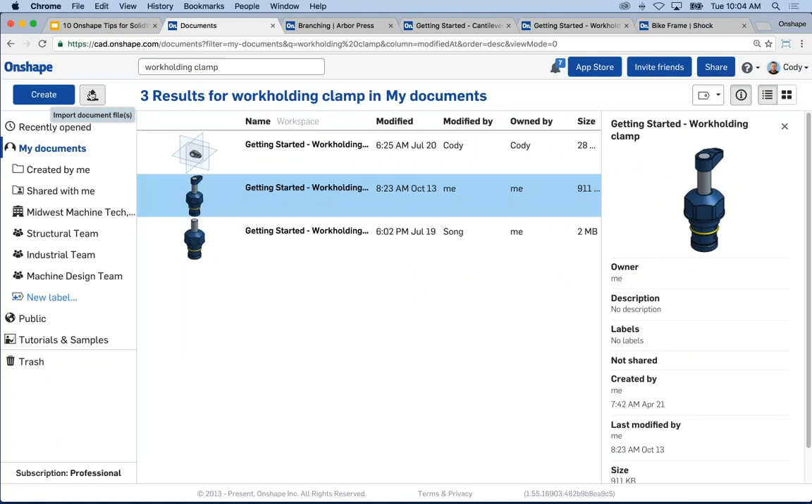You click import on the documents page, and you browse to the file, the zip file from SolidWorks. So here's a Come Along.zip that I've brought in from SolidWorks, and I'm importing it into Onshape. Now, one important thing that I want to mention is make sure that the zip file name matches the top level assembly name in SolidWorks.

And that's a default setting, so if you don't change the file's name, you should be fine. But just keep in mind, don't change the zip file's name before you import it. It must match the top level assembly in SolidWorks. So from there, I just choose open. I get my import options, just as if I were importing any other file. I hit OK, and it imports.

So that's really all there is to importing a SolidWorks assembly. The key thing is making sure that you have that zip file that you can then import. Once you import the zip file, it will of course upload and then translate so that you can actually view the SOLIDWORKS data inside of Onshape.

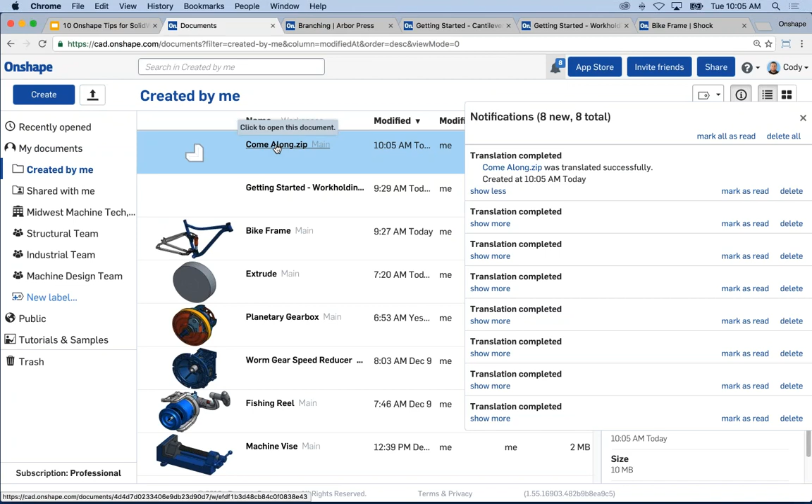So if we left click the come along here, it will take a moment to translate it, but what you'll get is all the tabs for subassemblies. You'll get a tab, of course, for your top level assembly. So here's my SOLIDWORKS designed come along imported into Onshape. So again, you get tabs for top level assembly, you get tabs for subassemblies. The parts will come in all together in a single tab, and they will come in the orientation they were modeled. So that's one important caveat that I want to point out.

And then also another question that gets often asked is, do the sketches or the features carry over? If I create a sketch in SOLIDWORKS, create a part, and then I import that into Onshape, do I see the sketch in the feature list? And the answer is no. It does not translate feature for feature.

So you do get all the parts, you get the subassembly architecture, the hierarchy that you're used to, but you don't see the individual features and mates that make up that assembly. And the key reason there is there's just a lot of differences between CAD applications that make that really not practical. So that's one of the first things that I wanted to mention.

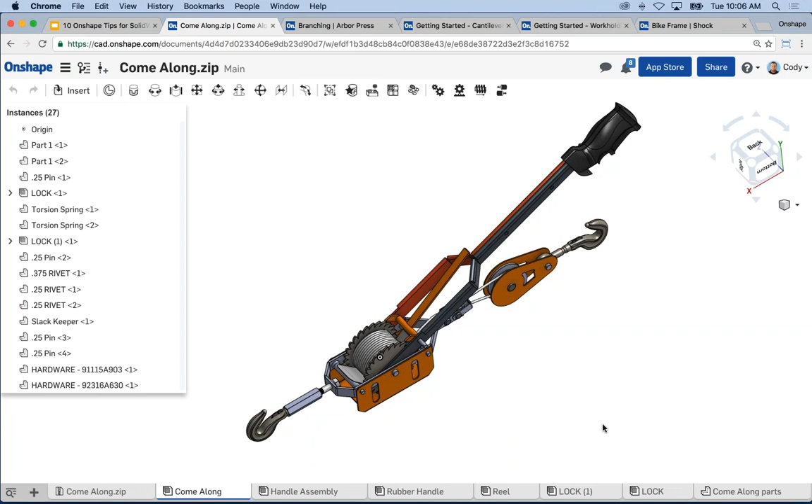Pack and go importing a zip file. You can bring in potentially hundreds of thousands of parts at once by using a single pack and go zip file. It's one of the easiest ways to bring over an entire project from SOLIDWORKS. So that is tip number 10.

Moving on, tip number 9 in my list is configurations. And it's one of the more common questions that we get from SOLIDWORKS users. I use a lot of configurations. What would I do in Onshape? In Onshape, we have the concept of what we call branches, and branches allow you to explore design variations. And it's probably the best tip that I would give if you're trying to create a lot of design variations in Onshape is create branches.

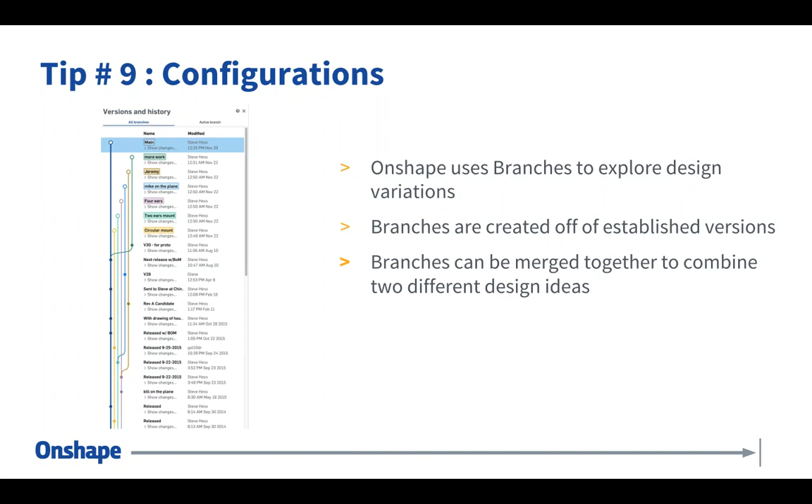Branches are created off an established version, and you can create as many branches as you'd like. And you can even take two branches and merge them together at some point in the future. So if you decide that you like the ideas of two different configurations or branches, you can take them and merge them together. Now I have a short demo of this, so I'm going to show you just creating a branch and then going through that process.

So here's a simple arbor press that I've designed. And let's say that I want to explore a version with a different base, or I want to build a configuration, quote unquote, of this arbor press that's different. And I don't want to impact this original design. The first step, and very important, is creating a version. So you'll see the button here, create version.

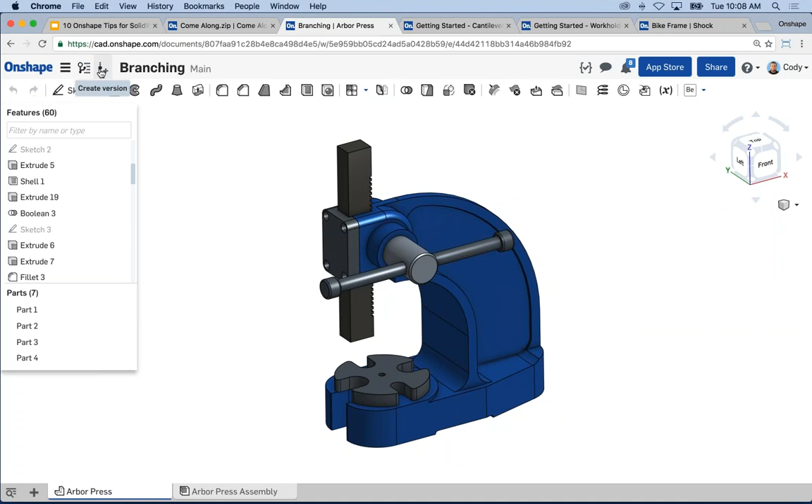Once you have an established version, here you'll see initial version, I can select the gear and say branch to create a workspace. And this is going to create a separate branch. Let's call this the square base. Click create. Now anything I do in this branch does not impact main, which is where I was at just a moment ago. And as I mentioned, you can do all the design changes that you want here. And again, it does not change anything downstream.

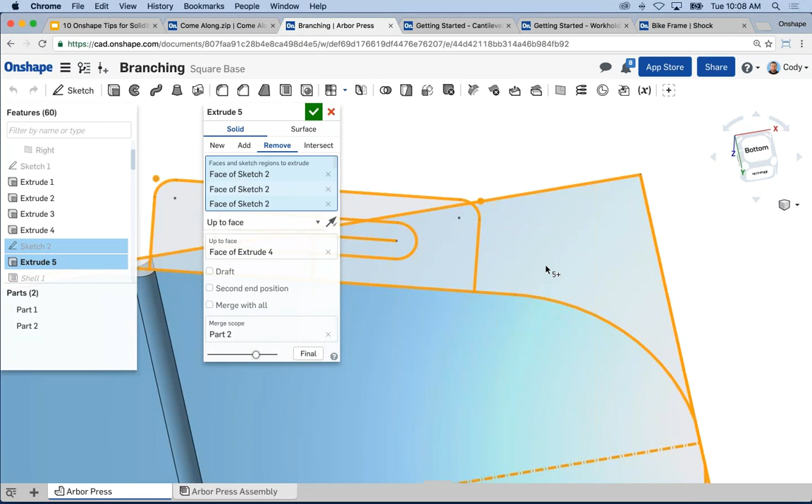So if I decide to edit this and start adding some faces, for instance, editing features only applies to the branch that you're in. Okay?

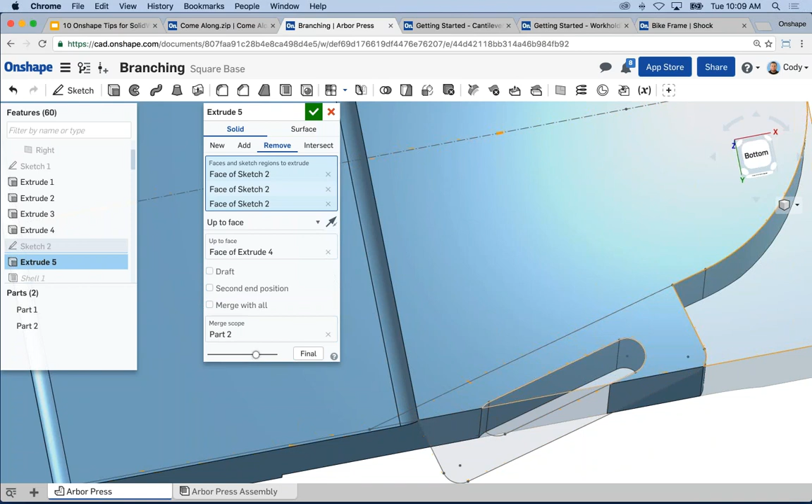So an important thing to point out, just make sure any design changes that you want happen in the right branch. Right? So now I can go through, select these individual contours, add to this feature, and create a square base version. Right? So we're editing this extrude, got all of our profiles. I'll hit the green check. That will then go through and rebuild and build a square-based variation of my arbor press.

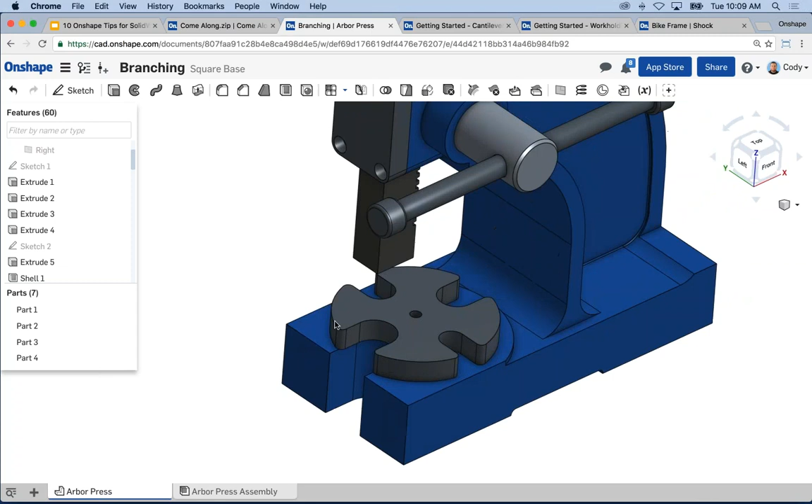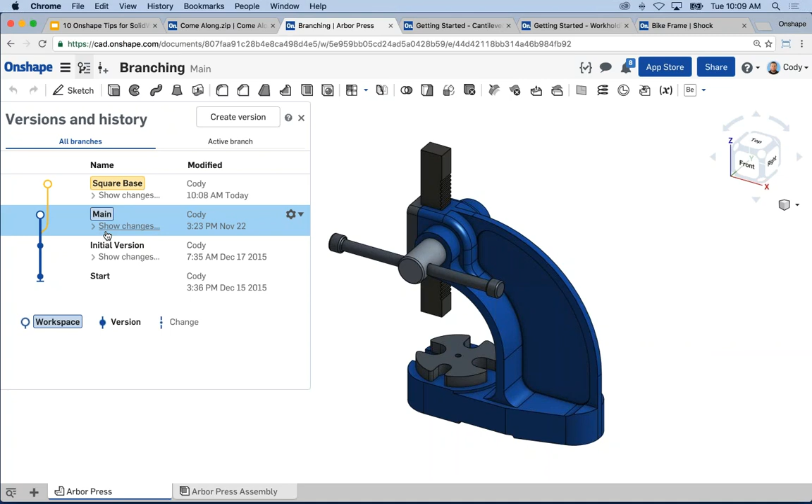The key thing here is, of course, anything that I'm doing only applies to square base. If I go back to main, you can see the design is the original, right? It's not impacting that. So you have these independent spaces to work, so to speak. So think of branching as your equivalent to configurations. It gives you that ability to explore different design variations.

All right, so moving on, the next tip that I have, tip number 8, the cut is not a separate button in the interface. And that's one important thing that I think a lot of SOLIDWORKS users miss on first glance is, I don't see an option to cut. Where's the cut button? And it's important to keep in mind, extrude, revolve, sweep, and loft all have an option within them to remove, and that's your cut.

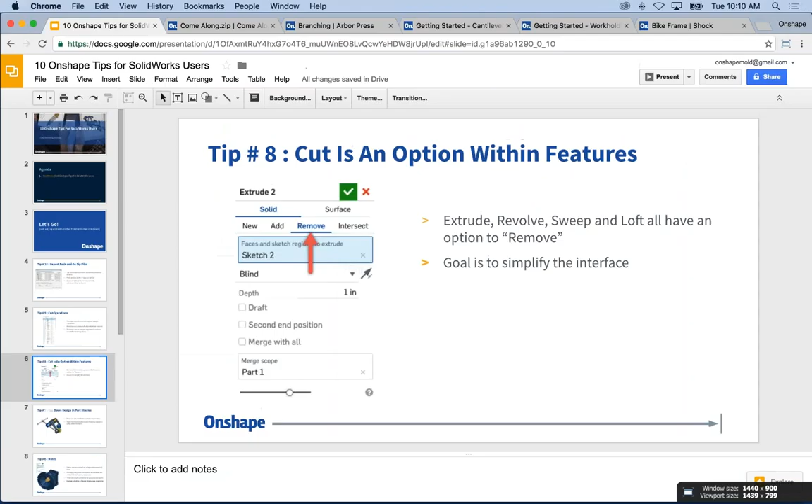And the idea is really trying to simplify the interface. So you go to the same button, whether you're creating a new feature and adding geometry, whether you're creating a cut, whether you're creating a whole separate part, it's all the same command. So let me show you a quick example of this, not terribly complicated, but I do want to point it out. When you're working in really any part studio, trying to create any feature, let's say that I'm designing this shock and I want to cut a hole in the bottom of the shock.

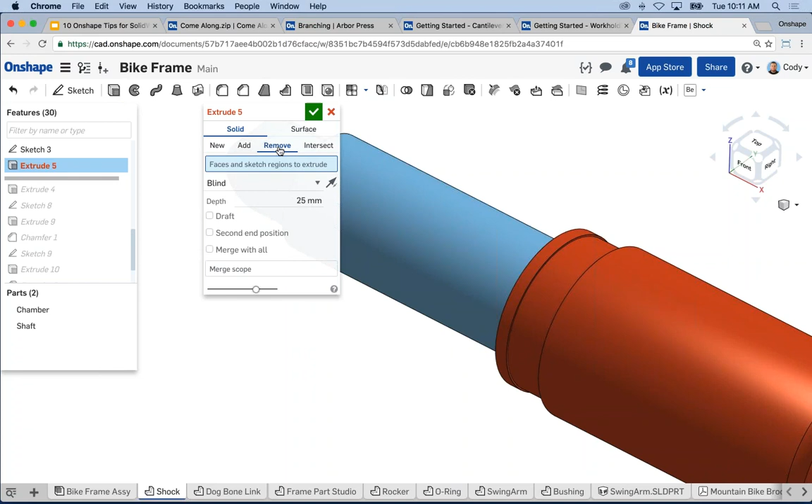And I've created my sketch 3 here. Notice again, no separate button for cut. I click extrude, then choose remove. That's the key. And then select the sketch that I want to remove. Now, in my case, I actually have several different parts. So I'm going to say I want to merge this cut with the shaft here, and I want a symmetric cut. And that's another small tip that I have for the SOLIDWORKS user.

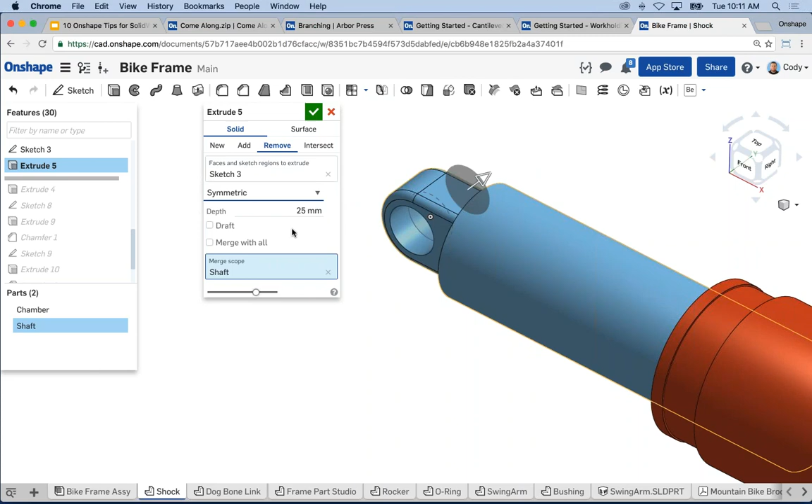If you're familiar with the option of mid-plane in SOLIDWORKS, we have what we refer to as symmetric, which gives you very similar behavior. Okay? So symmetric, I can hit the green check, and now I've created a cut in the end of this shock. And again, the key is whether it's extrude, revolve, sweep, loft, they all have that option for remove, and that will create your cut. So that's a big tip.

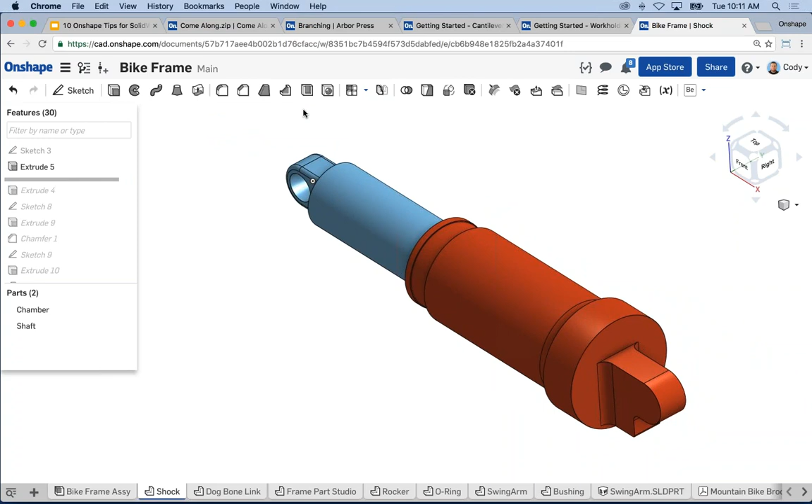It's one that can trip a lot of new SOLIDWORKS users up. Just keep in mind we don't have a separate button for cut. It's built into extrude, revolve, sweep, and loft. Now, let's move on to the next tip, and that is top-down design. And this is something that we get asked quite often. How do I build parts in context at the assembly level? And it's just because that's a common practice in SOLIDWORKS. I insert parts and I build parts with contextual relationships at the assembly level.

In Onshape, we've taken a different approach to this. You do not create new parts or modify existing parts in the assembly. You won't see those features listed in the assembly. They're only done at the Part Studio level. Now, what's different is in Onshape, you can have multiple parts in a single Part Studio, and it's actually a far faster way to do top-down design than building with the assembly context and having motion and all those things to worry about. So just keep in mind, if you're trying to build top-down, if you're familiar with the concept, top-down just means building multiple parts together with relationships to each other. We do that in Onshape in the Part Studio, not in the assembly.

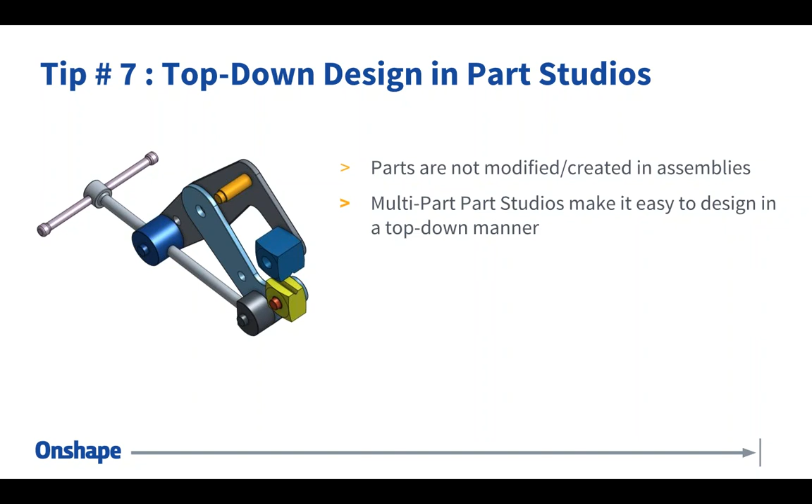Okay? So a short demonstration of this, I wanted to point out real quickly here, the cantilever clamp. So this is a single Part Studio in Onshape. And in Onshape, one Part Studio can have a single part. I can have any one of these parts by themselves, or you can model multiple parts together. And you can see in this Part Studio, I actually have 10 different parts. Large arm, short arm, threaded hinge, all these parts listed here. So this is a multi-part Part Studio, and the reason to do this is the same reason to do anything in a top-down manner. It just allows me a single place to change the design and have it impact many different pieces.

I'm not taking a lot of measurements between parts. I can drive everything off of previous geometry. Now, as I mentioned, this is a multi-part Part Studio, so you can build all the parts together in a single place. But you'll notice that I didn't model anything that wasn't unique.

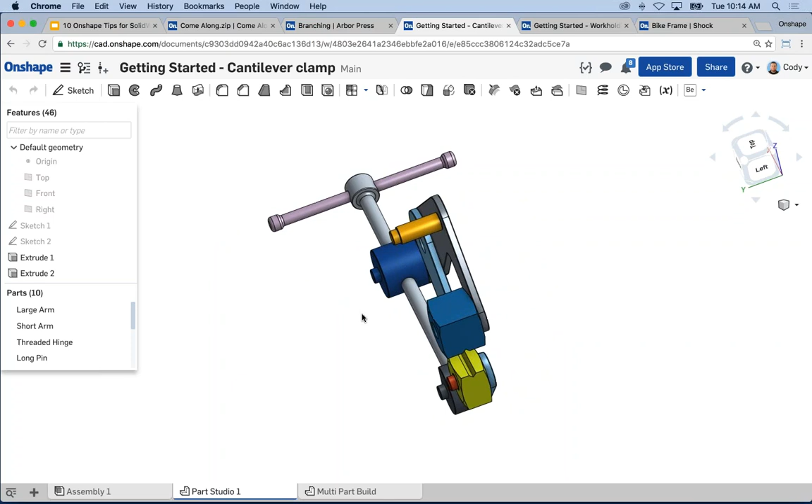In other words, this is a clamp arm that has 2 sets of arms. There's going to be another set on this side. And I could easily mirror them, but essentially this is the same part. So when we talk about assemblies, assembling all the instances, testing out the motion, that's when we get into assemblies. And that's really what assemblies are for.

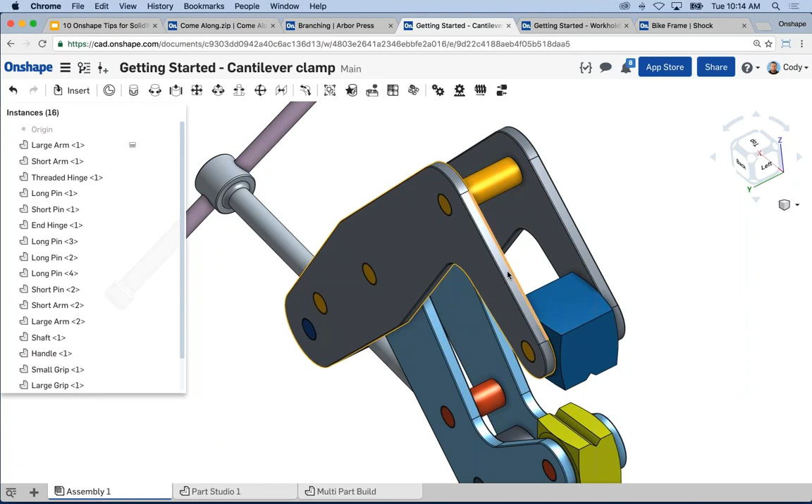So in Onshape, you create an assembly so that I can test dynamically the motion of my assembly. And I can also insert all the various instances of my parts, my nuts and bolts, and all the multiples of parts, put them all together and get an accurate bill of materials and so on.

Okay. So again, driving back to the top-down design concept, you can model multiple parts together in the same Part Studio. And this is the equivalent of building in context in the assembly in SOLIDWORKS. Real quick question. All parts in a Part Studio make a long feature list when a part becomes a little more complex, how to work around it?

Keep in mind, one of the biggest tips that I have for users with long feature lists is doing filters and searches. So if you go through and name your features, you can create filters and searches to kind of organize and easily find pieces within your feature list. And you could query by things like name. You can see a little tooltip there, type, part, and so on.

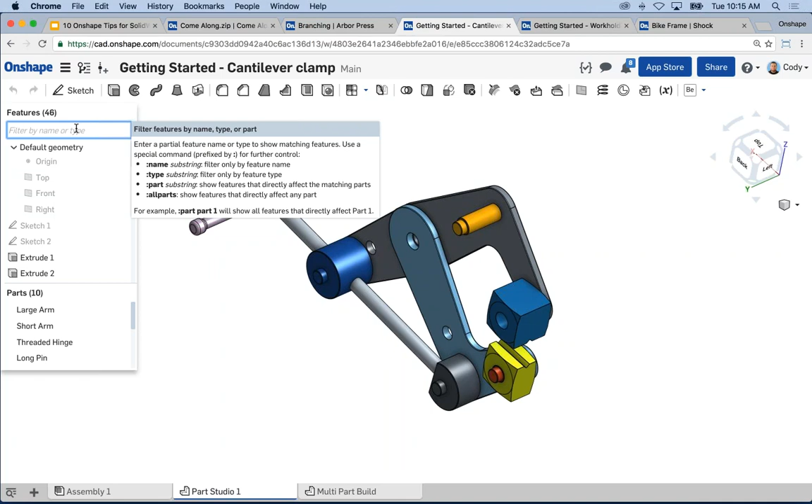So you have parts. I can say, show me all parts with this name, or this in the name. So anyway, the feature list filter, I should say, is an easy way to break down the feature list when you start to have lots and lots of features.

All right, so moving on, as I mentioned before, this is a single Part Studio with multiple parts modeled in this single space. How would you go about doing that? And what I'd like to do is give you a simple example. So let's break it down a little bit here. In fact, let's start from scratch. Let's delete everything but the sketch that drives it.

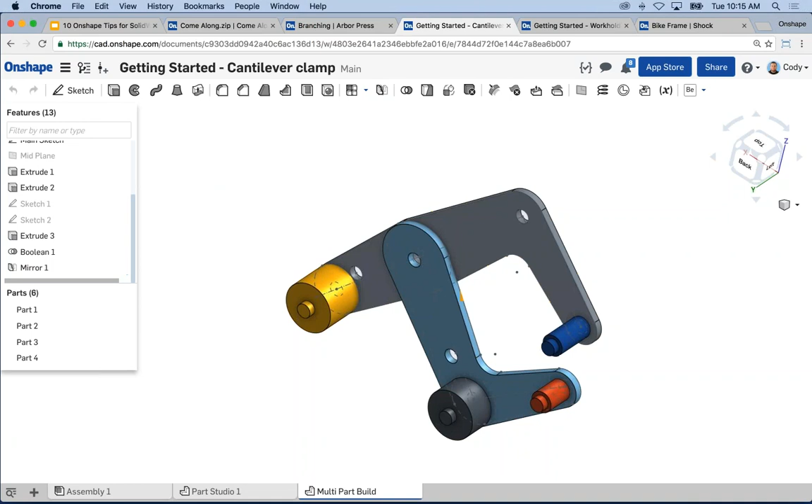And as I mentioned before, one of the biggest advantages of doing something like this is having a single feature driving multiple things. And this is a great example. I have one sketch called main sketch, and I'm actually going to drive several parts off of it. So I'll select the extrude command, and if you just click the sketch in the feature list, you'll grab everything in it, right? Which isn't exactly what I'm looking for.

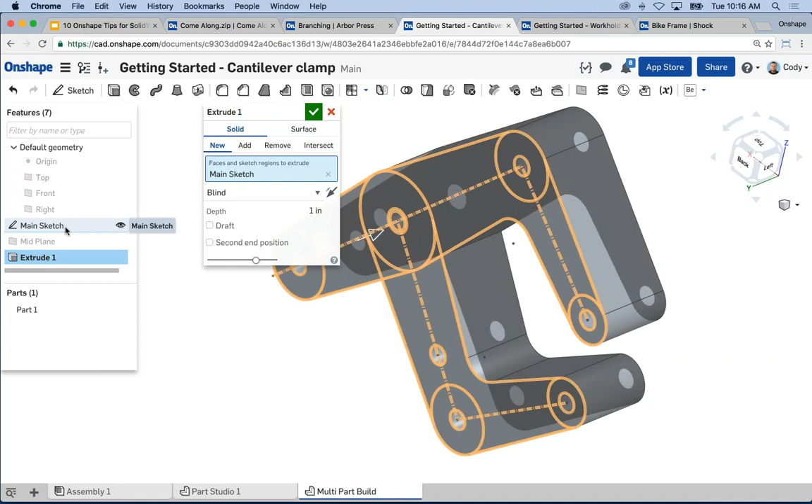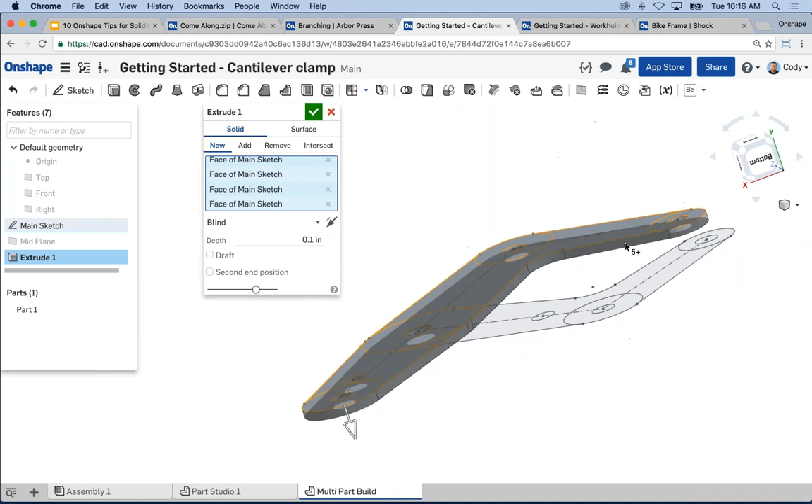This one sketch is going to drive many different things. So I'm going to X out of that. I'm not going to choose the entire sketch, and rather I'm going to select the profiles, the individual pieces of the sketch that I want to extrude. So we can select all our pieces here and create the exact shape of the arm that we need. Right? So now I'm only using part of this sketch to drive this feature. Green check. Now I have the first arm in my clamp.

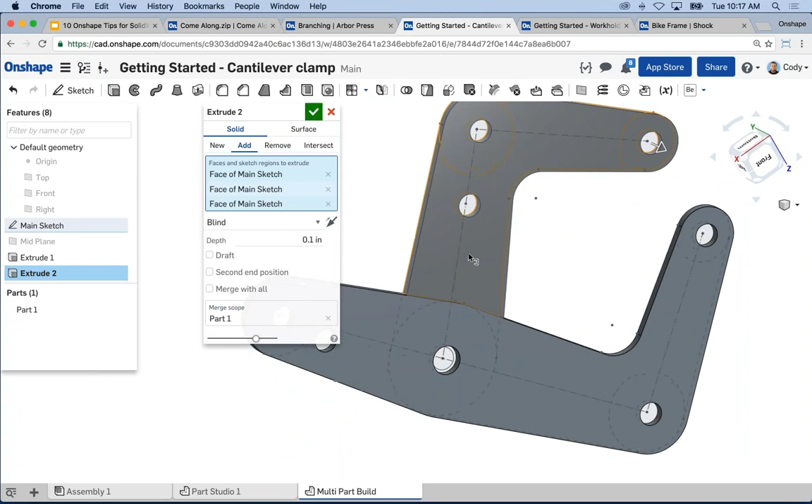Now we can do that again. I can use the same sketch to drive the second arm as well. So again, I click extrude, and this time I'll select the other profiles that I'd like to extrude, the other arm, right? So now I'm just selecting different pieces of the same sketch, but now it's really easy for me to say, okay, this is not merged with the original part. Instead, it's a new part. And that's really the key thing.

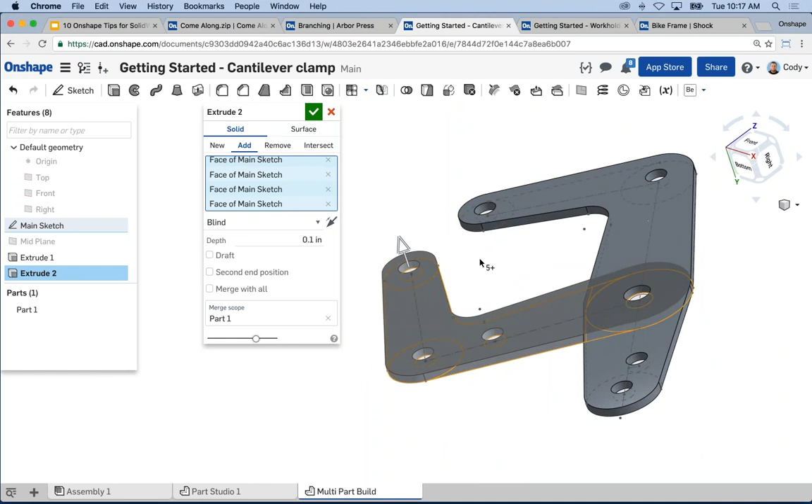So as I'm creating this new extrude, I actually want this to be a separate arm, not added to this arm. So I click new. Right, I click new, that will create part 2 in my Part Studio. And so now I've modeled 2 parts that are both driven off of the same sketch. Right, so if I edit sketch 1, both parts will update.

And you can go on for a long list of features that are all driven from this single one, and it allows you to make a change very quickly and have it propagate potentially to hundreds of parts with just a few clicks. And that's the idea behind top-down design in general.

If you've come from a SolidWorks modeling environment where you did that, just realize a multi-part part studio gives you very similar behavior. In fact, oftentimes it's a much faster approach in Onshape.

So let's get into the next tip that I have for you, and that is tip number 6. And this is just a general tip with regards to mates. It's one of the more common mistakes that a new Onshape user coming from SolidWorks will make, and that is they will try and mate parts in the assembly using the same techniques they used in SolidWorks. And you can get away with that. There is the equivalence in Onshape, but there's a much faster approach if you really learn the technique that we've tried to teach, and that is using mate connectors.

So a brief description of this. In Onshape, we're not using combinations of faces to mate a part. So if you're familiar, for instance, mating a bolt to a hole. If I were to mate a bolt to a hole in SolidWorks, oftentimes I would use a combination of mates. I would use circular face to circular hole, concentric, and then maybe some kind of coincident or planar between the flat faces of the bolt and the flat faces of the part. It's a combination of things to get it into position and not spinning. Often even 3 different mates. In Onshape, that's one fasten mate.

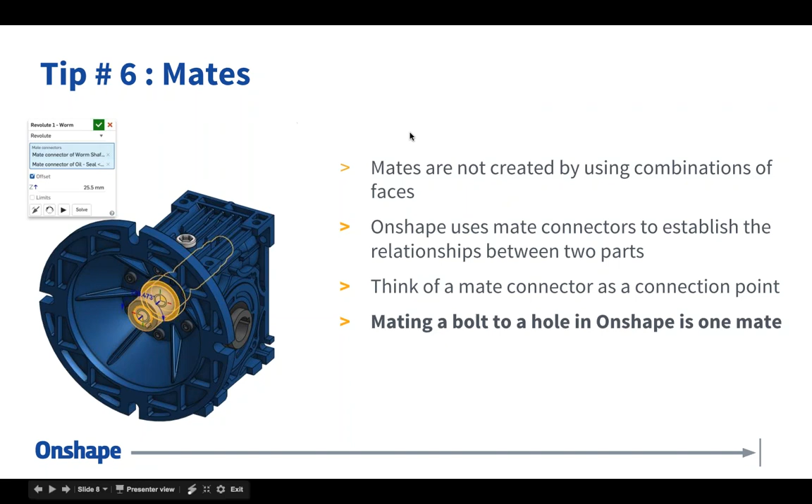Revolute allows for rotation. So the key thing there again is think of it as a little bit different philosophy. Rather than selecting a combination of things to locate a single part, use its connection point to define how it connects to another part. Again, we refer to them as mate connectors. So let's do a simple demonstration of this. Bear with me for a second.

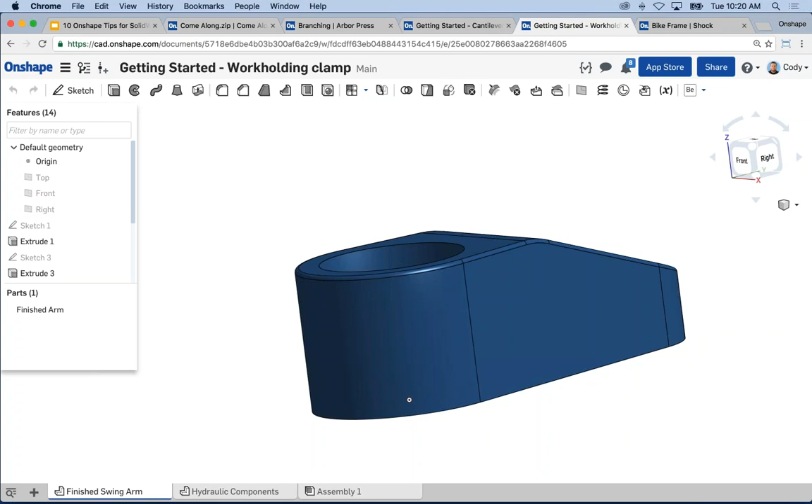I've got two part studios, and as I mentioned, you can model a part by itself. Here you can see I just have one part in this part studio, my sketches and features here, but only one arm, and that's fine if you like that approach of modeling one part at a time. There's nothing wrong with it, but you can also model multiple parts together. So here I've got three different parts. This is a little hydraulic clamp, and I have a cylinder, I have an O-ring, and I have a plunger. So I have three parts modeled together in this part studio.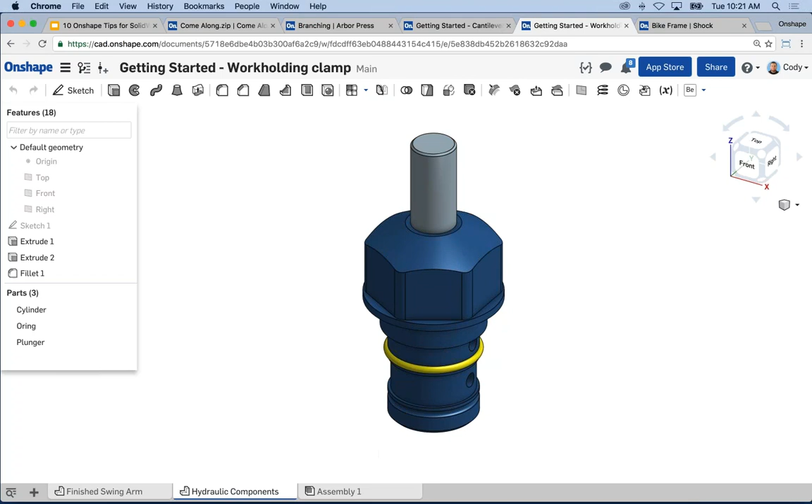Now I want to take them and assemble them so that I can test the motion out. Remember, in a part studio, we can't dynamically drag the plunger up and down, but in an assembly, we can. So I'll jump to an assembly, I'll click Insert, and I'll select the entire hydraulic components part studio. Because they're all modeled together, they all come in together in the same orientation. So it's really easy to insert all three, but they're not constrained in any way.

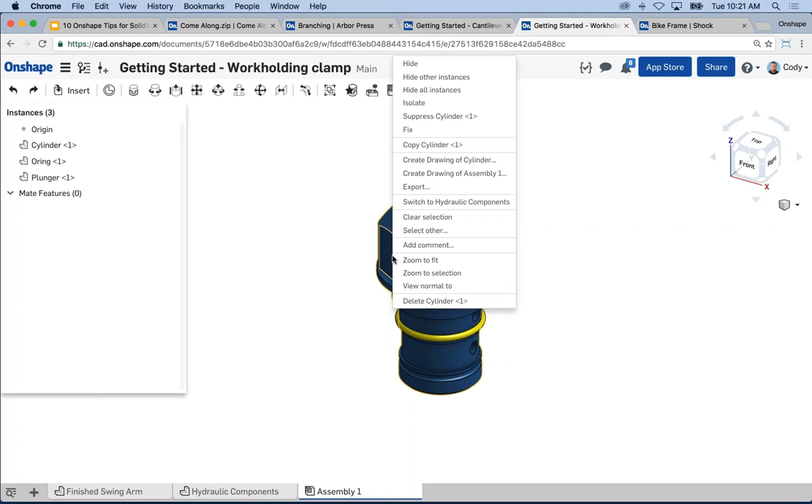So just keep in mind, when you initially insert your parts, they're not fixed. You need to define what is your fixed part. So in this case, it's the cylinder. I'll right-click, say Fix, and now the cylinder's fixed, but these other two parts are not.

Now, another big tip that I have is oftentimes in Onshape, you don't even have to mate parts at all. In this case, the O-ring was modeled in the right position in the part studio. I've inserted it into the assembly. It comes in the same position, and it doesn't move. So it's already in the right position. I just need to group it with other parts that don't move.

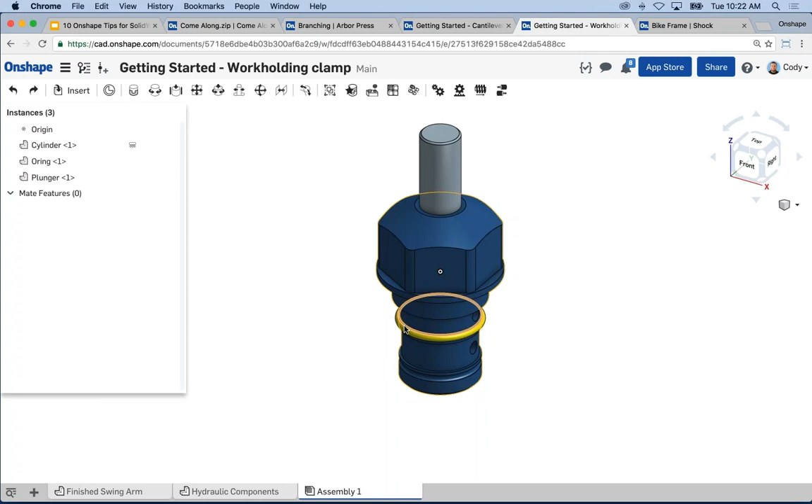So essentially, I can select any parts in here and say group, and they become a fixed thing. They work together as one. And it's an easy way to constrain parts when you've modeled them together like I've done here. I can select group, select the cylinder and the O-ring, and now I don't have to mate the O-ring in place. Right?

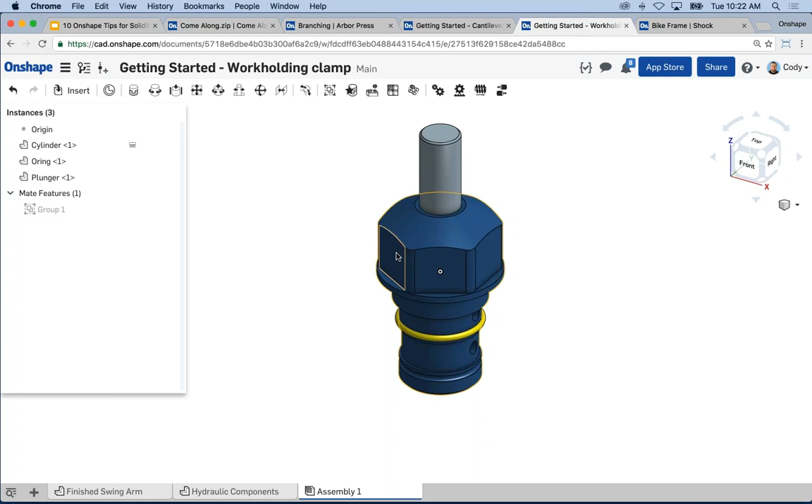It's grouped with the cylinder's fixed, so it's fixed in its current location. Okay. Now, another tip, you can copy and paste parts. I can use Control-C, Control-V. So just a tip, if you like keyboard shortcuts, Control-C, Control-V, or Command-C, Command-V if you're using a Mac.

But now we get into the big advantages of Onshape mates, and that is, I want to mate the O-ring to the groove, right? I have a second O-ring, I need to put it into the bottom groove, and in a more traditional CAD system, this would be a combination of things. Some kind of concentricity, some kind of planar alignment between faces, something like that to keep the O-ring in position and not spinning. In Onshape, this would be considered one fasten mate.

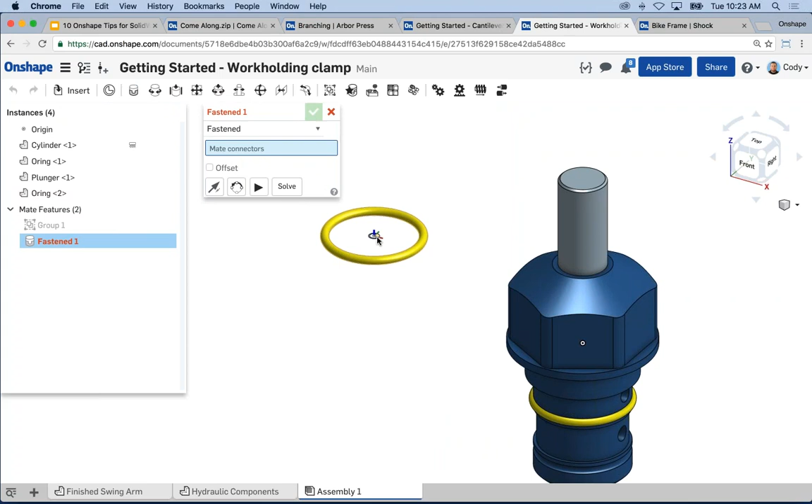So I select fasten, then as I mouse over the part, you'll see that mate connector appear. And it looks like a little coordinate system at the center of this O-ring. And again, think of it as your connection point. So I want this point on the O-ring to connect, obviously, to the center of this groove. So as I move my mouse over the groove, you'll see the mate connector appear for it, right?

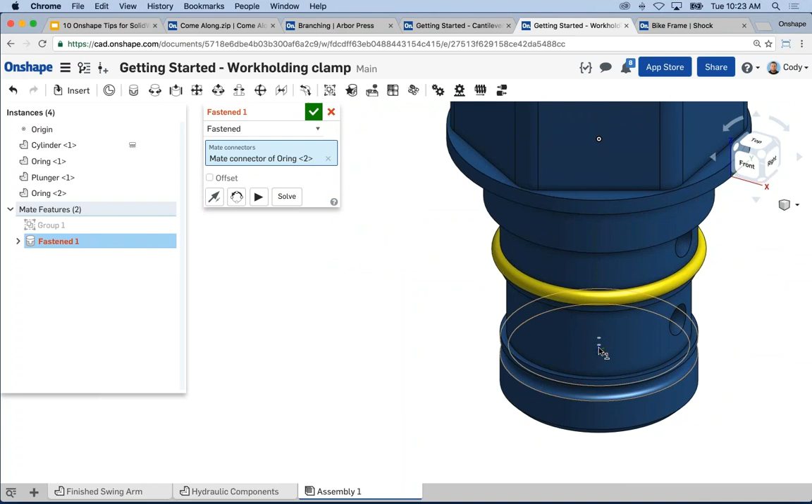Another tip, if you hold down Shift, it will lock those mate connectors on the screen. So here you can see I'm moving the mate connectors around. I'll choose the center one, right? And now I've mated the O-ring to the cylinder. One mate put it into its position. Okay.

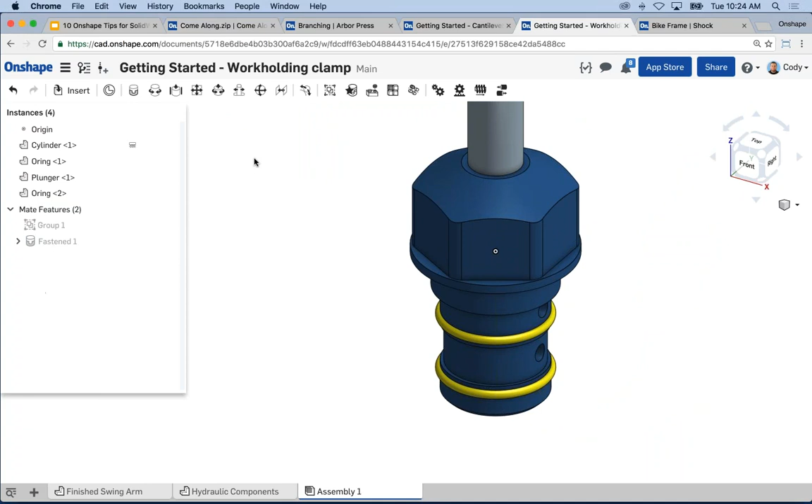Question, how did the mate connector get in the O-ring model? It's a very good question. It's automatic. So as you select a mate, if I choose any mate, let's grab this plunger. And let's say I want a cylindrical mate, and I just move my mouse over the part, they automatically appear. And what you'll see is common points that you may want to attach to. I want to attach to the end of the shaft or the middle of the shaft. Those will be connection points by default.

Now, you can also create your own connection point. So if you have one of those scenarios where Onshape doesn't pick the right point that you want to attach to, you can just create a mate connector manually. So just a tip, you don't have to use these auto-selected points, but oftentimes, I'd say 9 times out of 10, they're useful. They're what you want, and you don't need to go in and create anything manually.

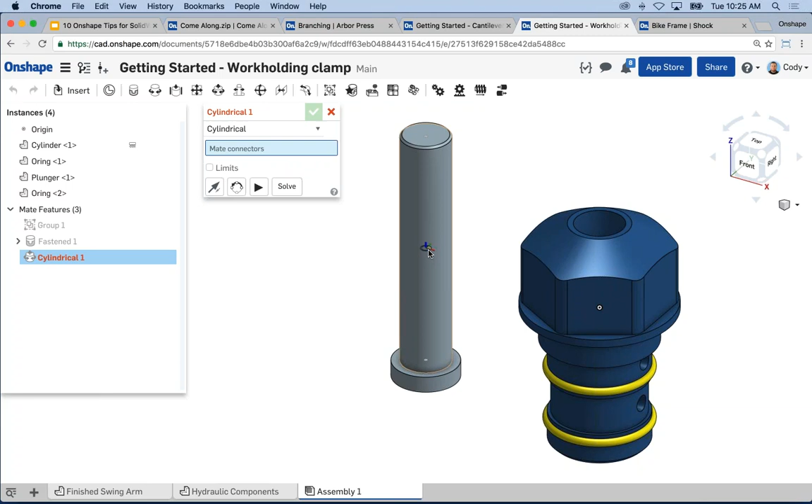So again, just moving my cursor over it while in a mate command, I see these points appear. In this case, I want to mate the center of this shaft into the actual cylinder. So as I move my cursor over the hole in the cylinder, I see the top, midpoint, and bottom, and I can keep going down if I wanted to. In this case, we'll just choose the bottom of this hole, and it brings those 2 points together. So again, all we're doing is choosing the connection point, and it brings the 2 connection points together of the 2 parts.

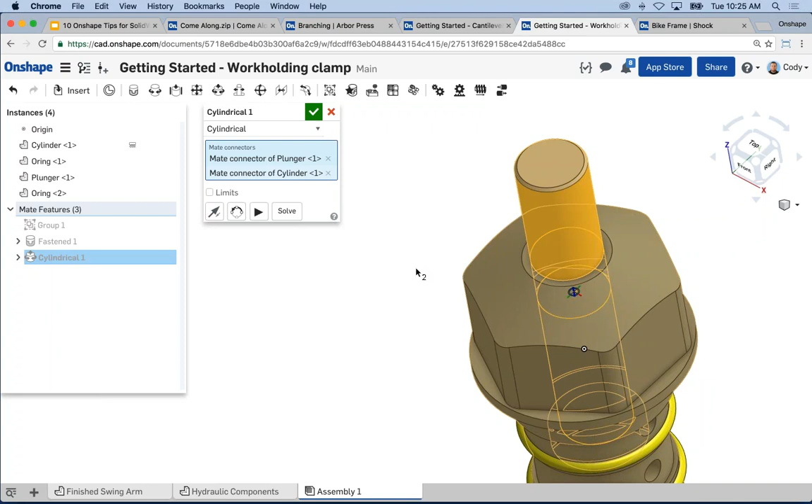Now, the question then comes up, well, how do I know that this is going to move the way I'd expect? It's supposed to move up and down, and it's supposed to be free to spin. How do I know that that's working? And one big tip that I have is while in the mate command, you can hit play, and it will animate the degrees of freedom that you have, the motion that you have, right? So if you want to see how this is free to move, just click play.

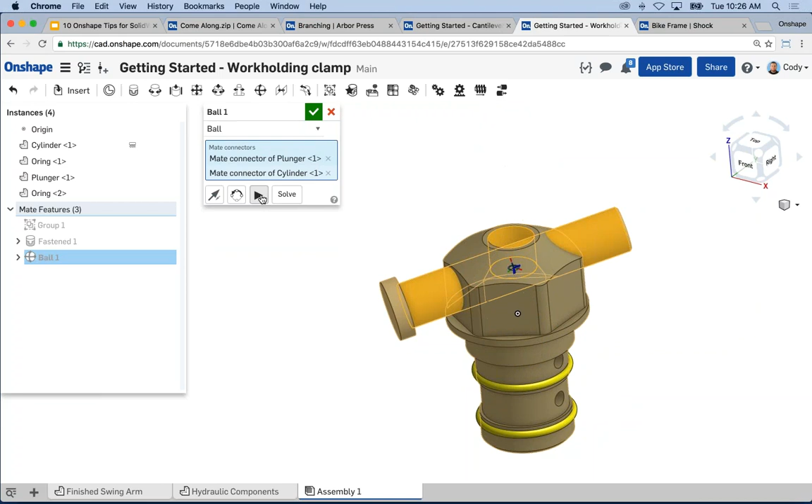And you can also try out different mates. So I can say, okay, well, let's see what a slider mate looks like. Click slider, hit play, and now I can see, okay, it's free to move up and down, but it can't spin, right? Let's see what a ball mate looks like. Click ball, hit play. That is definitely not the mate that I'm looking for, right? Rotation, but no linear travel. So we have all these different mates. A big tip that I have is you can try out different mates and see the one that works just using that play or animate command.

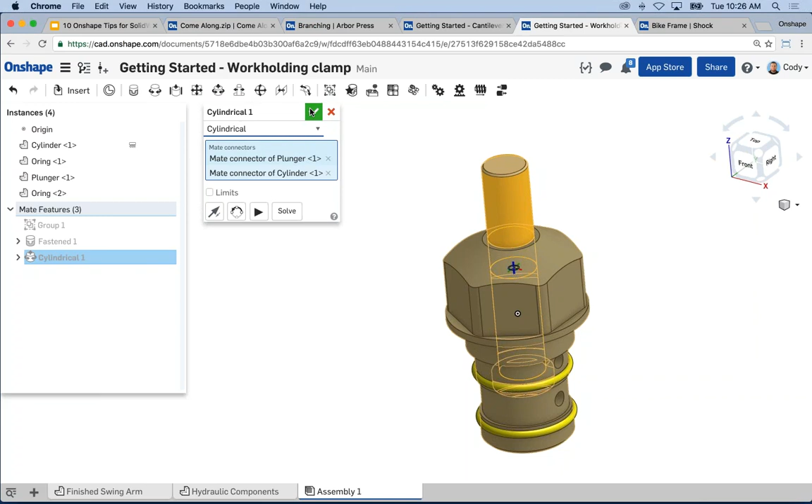In this case, we want cylindrical. Cylindrical allows it to rotate, and it allows it to move up and down. So I hit the green check, and now I've created that mate. And by the way, I didn't mention this, but all the mates, the group command, will show up in your instance list here on the left. So if you need to edit or change something, you can right-click the mate in that list. So that's a big one.

Again, the mate connectors are a little bit different approach to attaching parts, but oftentimes it means fewer mates in your list of mates, just because instead of using a combination of faces, you use a single connection point between those parts.

Do we create, this is a question by the way, do we create mate connectors in the part or at the assembly? And you can do it either way. What I'd recommend is if you use that part in several assemblies, you would want to create the mate connector at the part level, because then it would go wherever you insert the part. If it's a one-off thing and you just need a mate connector for this one assembly and you don't need to see it at the part level, then you can just create a mate connector at the assembly.

So it's entirely up to you. I think there are applications for creating it at the part or the assembly. It really depends on what you're doing. Okay, so we've discussed mate connectors. As I mentioned before, we're taking a point from one part and a point from another part and bringing those 2 points together, and then define the movement between them based on the type of mate that you choose.

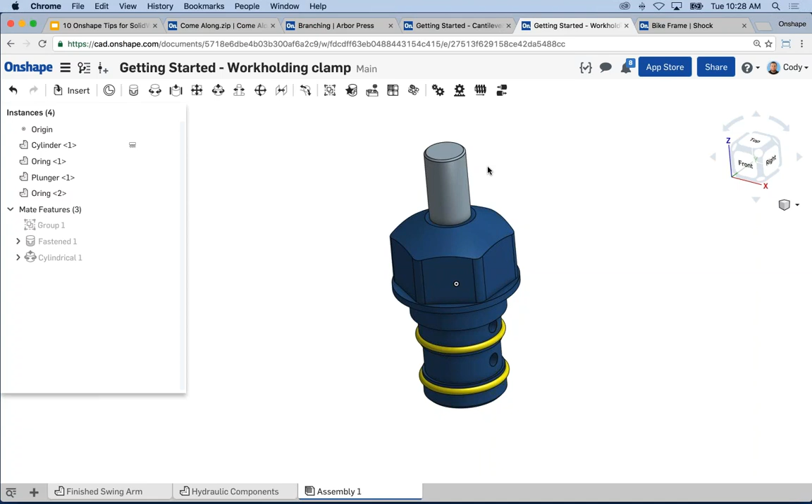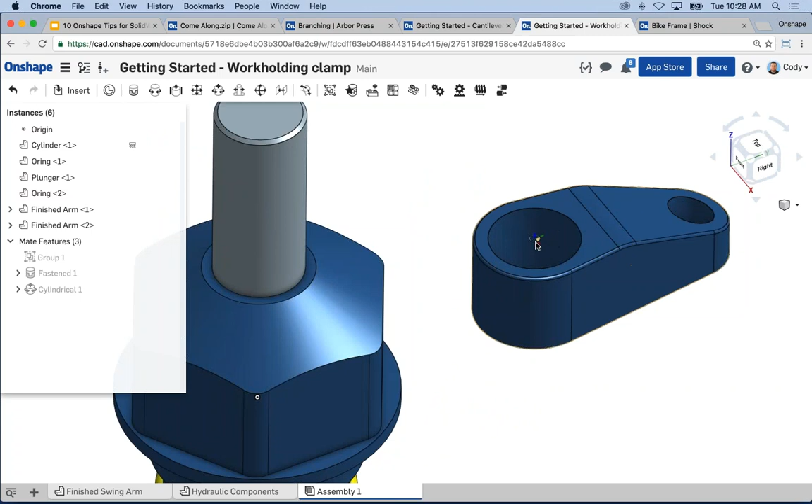And of course, in an assembly, the key thing is you can dynamically test the motion out. So I can grab and drag and see that this plunger is free to slide up and down. So real quickly, one more time, I want to insert this swing arm, the clamp arm, and I want to show you a quick example of what will happen if you have an already determined mate connector. And as I mentioned before, most of the time you won't need this. You just mouse over the geometry and the mate connectors that appear will be useful. But you can create your own.

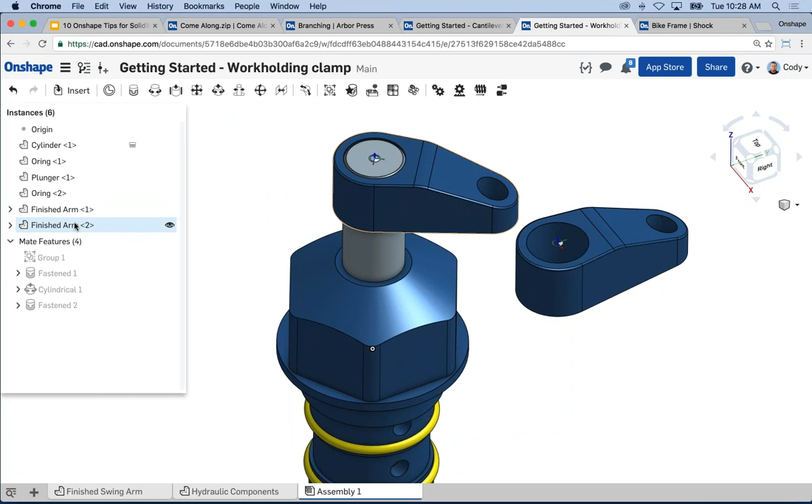So you can see in this finished swing arm, I have an already created mate connector. And it just makes it easy for me to define that point real quickly. So I guess I inserted 2 of those arms. Just trying to drive home again the idea that you're using a mate connector on each part. And you can create your own beforehand, or you can just use the Onshape provided ones you get when you mouse over geometry.

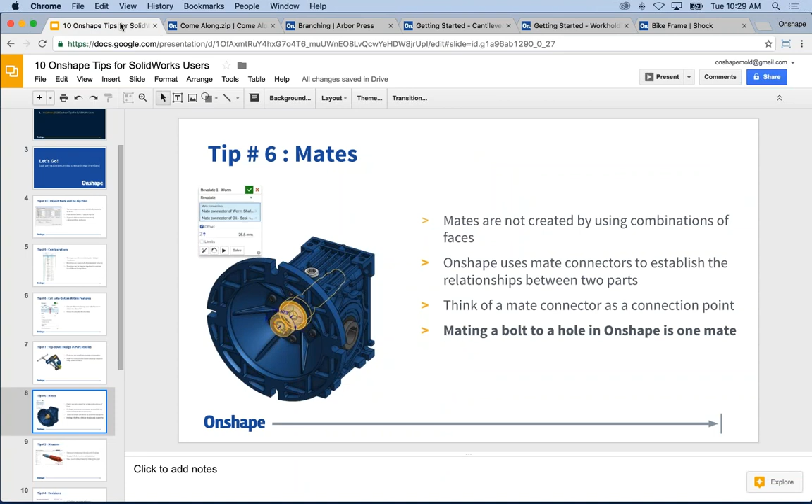All right, so that is the tip on mates, and it's, again, a big one. It's a bit different than SolidWorks, but oftentimes means that you can have far fewer mates, far quicker assemblies to build. So let's move on to the next one. This is another frequently asked question. What about measure? How do I measure in Onshape? Is it a button? Where do I find the measure button?

And the answer is it's built into Onshape itself. So if you select any geometry, you'll find a measurement in the bottom right corner. And it's not a command that you have to turn on or off. It's always there. So anytime you select anything in Onshape, look in the bottom right corner if you're looking for a value, a measurement. So a quick demo of this.

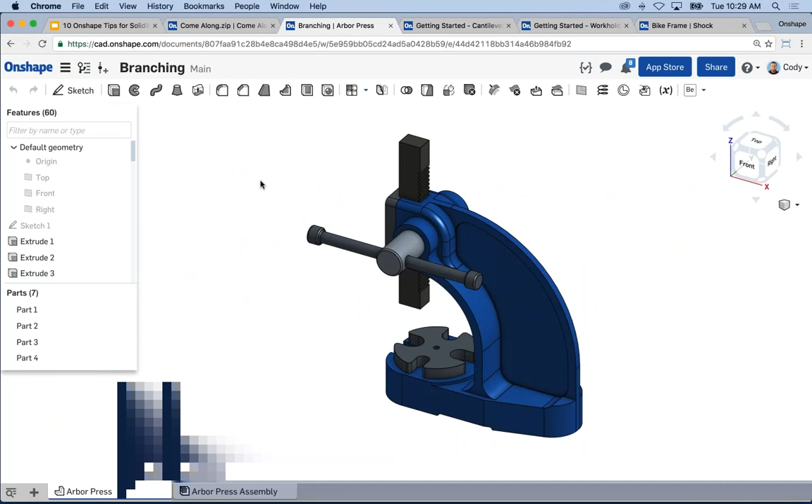Real simple to show. What if I want to know what this radius is? I left click the radius, and again, in the bottom right corner, there's the measurement, right? So 1.75 inch is the radius. I can select 2 points, and it's going to give me the minimum distance between those 2 points in the bottom right corner. So really the key thing is just select whatever it is that you want to measure and look in the bottom right corner.

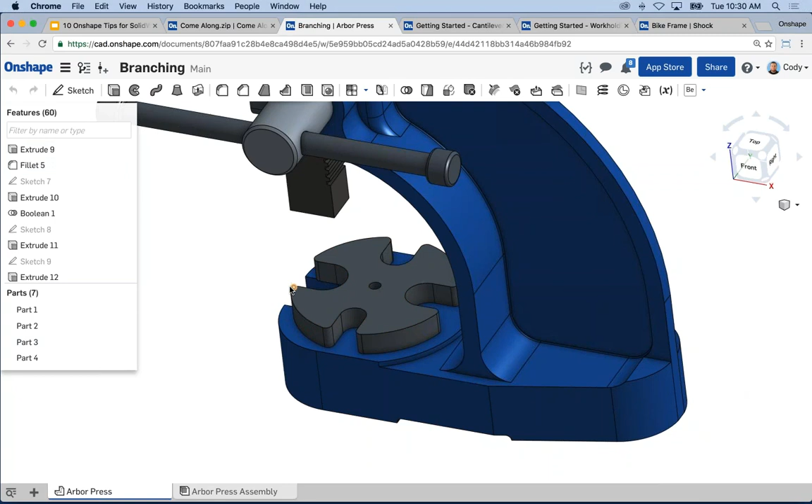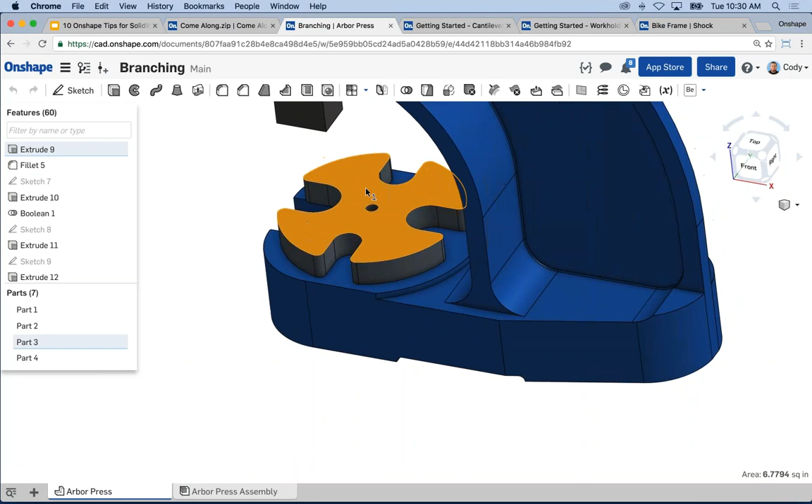Now you can do things a little bit more complicated, like I can do minimum and maximum values. I can do deltas between two things. So it will give you more information if you expand out a bit. So here you can see I have minimum distance, center distance, and the delta values for it. So just keep in mind, all the measurements are there. Just click the geometry. If I click a face, for instance, here's the area in square inches that face has. Let's select a circle, for example, diameter 0.25.

Okay. Another question that ties in with this then is, what about weight? What if I apply a material to a part? How do I figure out how much it weighs? The first step, of course, is to assign a material. So if you right-click a part and you assign a material, let's choose aluminum, let's say 6061.

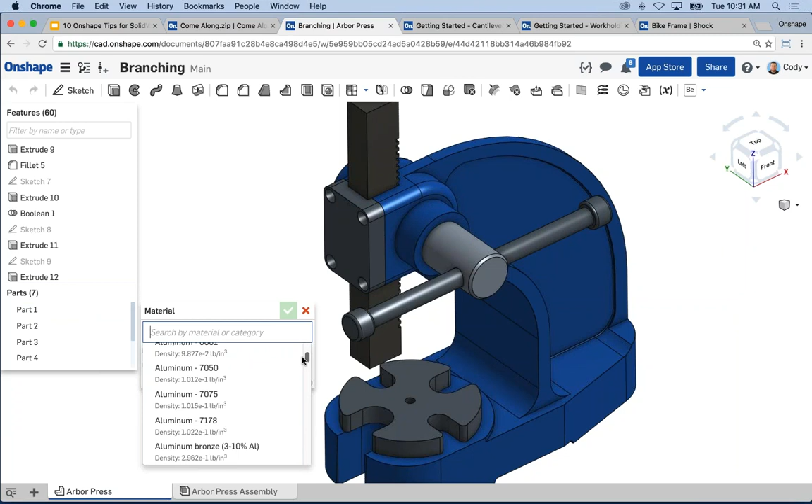Okay, green check. So now that you've applied a material, if you left-click the part, you'll see in the bottom right corner, same place as the measurement, a mass properties. And then you can see mass, center of mass, and all those properties that you may want. Important step, though, make sure that you've assigned a material before you try and do this. Okay?

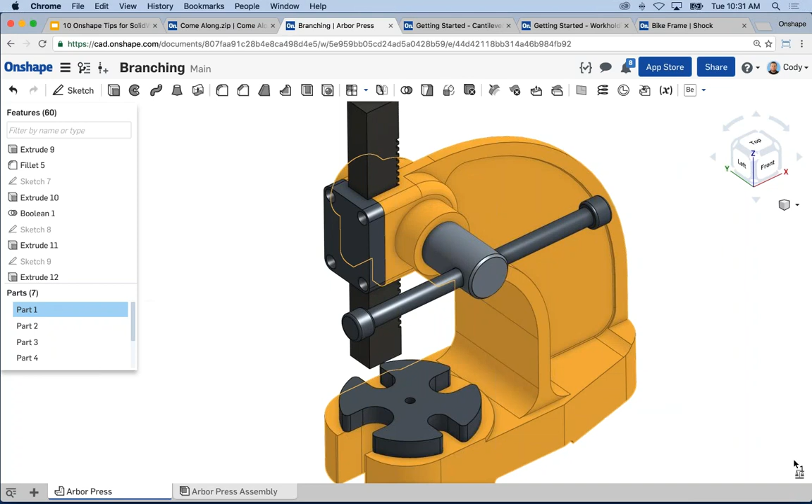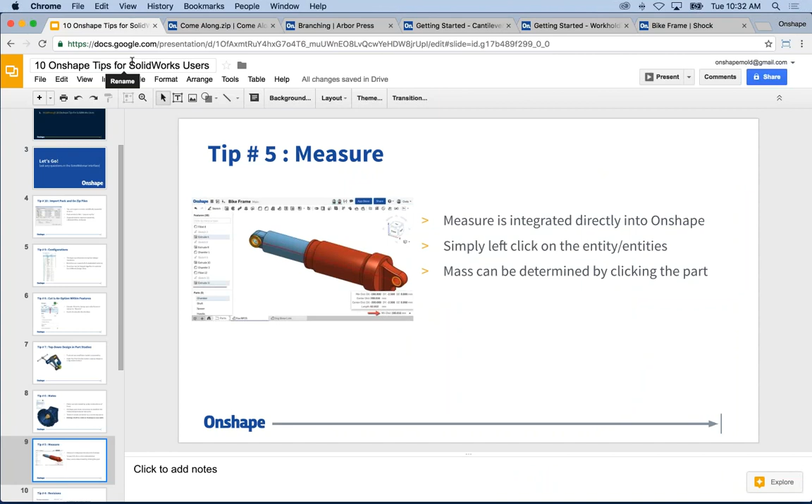But again, just left-click the part. You'll see the little mass properties icon where the measurement normally is, and you can click on it and get the mass. Okay. So it kind of ties in with the measure, but just keep in mind, measure is just one of those things that's always on in Onshape. Just left-click whatever it is that you want to measure, and you should see that measurement appear in the bottom right corner.

So moving on to the next tip, revisions. This is another commonly asked question. Real quickly, before I get into it, a question. Branch basically makes a full copy of the workspace, so I can import, etc., and does not affect the main workspace, and that's true.

So the question, if you create a branch, it creates basically a copy of the full workspace. So if you import, etc., if you make any changes in that branch, it does not impact the main workspace or any other workspace that you may have. And so, yes, the answer is yes to that question. It is one of the big benefits. If you create a branch, you don't have to worry about impacting others.

Okay, so the question that often gets asked from a lot of SOLIDWORKS users is, what about creating a revision? I have EPDM or I have XYZ PDM system, and we manage revisions inside of it. How would I go about doing that in Onshape? How would I go about accomplishing, being able to see and capture those milestones in the design?

And the tip is, in Onshape, we create a version. In Onshape, a version is a view-only snapshot of the entire document. And the key thing there is you can always go back and look at it. So let's say I'm making a product, and I'm pushing the product revision A out to market. And 6 months from now, we get an ECO, and we need to create revision B.

And we create revision B, and we realize, 6 months later, we need to go back and look at revision A, maybe export the models of revision A. That's the idea behind versions. You create a version, it allows you to go back and look at those models at that state very easily. Now, this is different entirely from history, which we're going to get into in just a second.

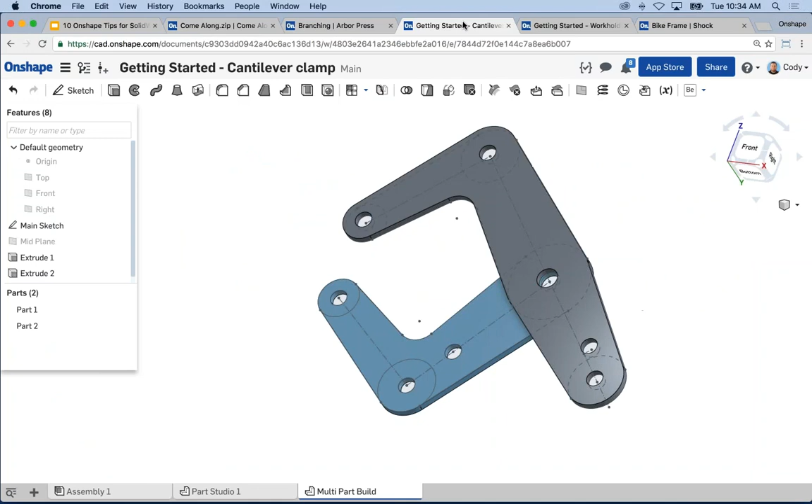You'll see an icon in the top left for create version, and you give it a name. Let's say revision B. Okay. You can add a description if you'd like. You can edit specific properties within the version, and this is an important one if you're creating a bill of materials and then maybe exporting that to PLM systems and so on.

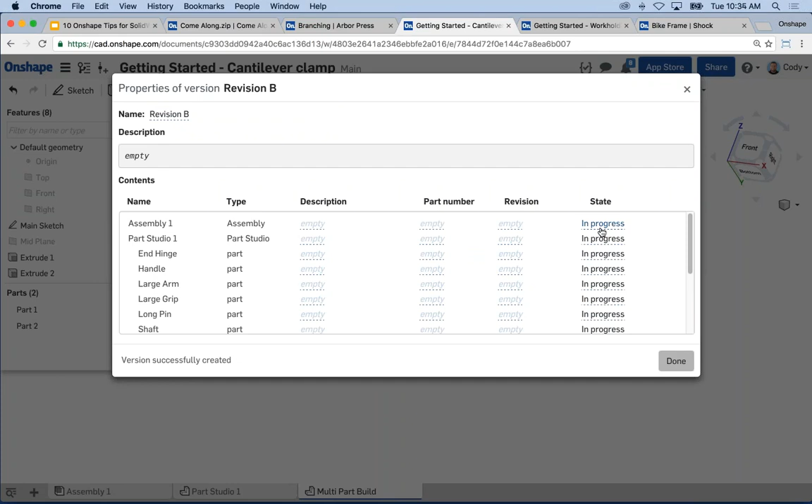You can go in and enter descriptions, part numbers, revisions, states for individual parts within the document and have that captured as part of creating the version. So just keep in mind, you can edit the properties associated with it, but that's really it. You click create version, you click done, and it creates a version in your versions manager.

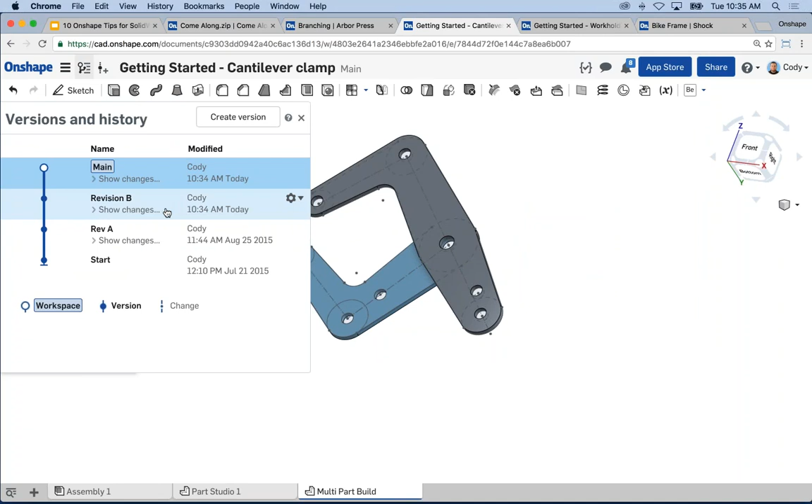So right next to the create version is a little icon for versions, and you can see I have Rev A, Revision B, and I can left-click on them and see the design as it existed at that time. So if I click on Rev A, it's going to load the model as it existed at 11:44 a.m., August 25th, 2015.

So I'm rolling back to that state. If I left click Revision B, it's going to take me to a view-only version of the design, of the version I created just a second ago. So just keep in mind, it's grabbing a snapshot that you can always go back and look at or export the models as. That's another commonly asked question.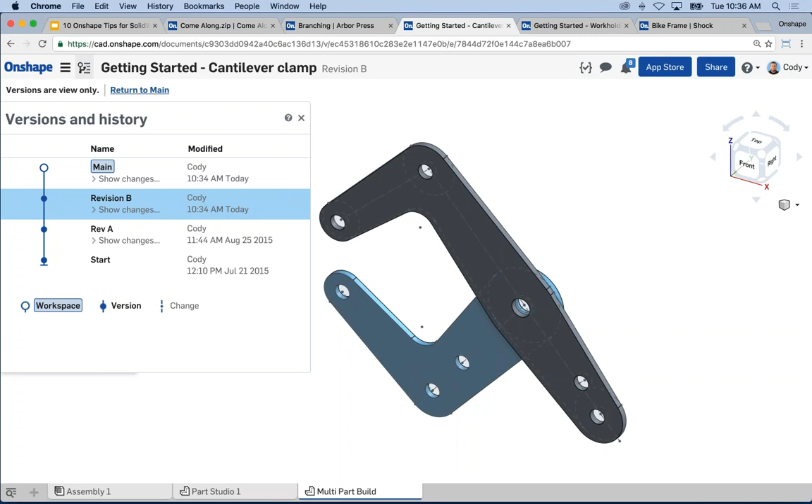So that is versions. Versions are view only. They cannot be edited. So an important tip, once you create a version, that's it. It cannot be changed. All right, so that is creating a version. Again, the commonly asked question there, what about creating revisions? I use a PDM system to manage revisions. In Onshape, we can create versions to capture those milestones in the design.

Now, the next one, keyboard shortcuts. And I find that a lot of SOLIDWORKS users love keyboard shortcuts. And in Onshape, we have a long list of keyboard shortcuts, and they can make a huge difference in how quickly you really start to come up and use Onshape. And the big thing is, a lot of Onshape commands you can find in right-click menus, you can find in the toolbars or interface, but keyboard shortcuts still seem to be one of the more common approaches for the 8-hour-a-day hardcore engineers. So we do have a long list of keyboard shortcuts.

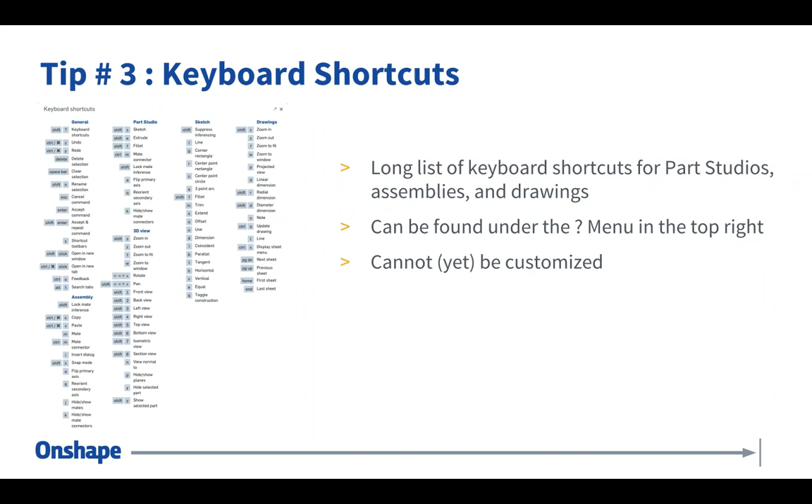You'll find them under the help menu. And if you're not familiar with it, the help menu is the little question mark menu in the top right. If you click that question mark, you'll find a lot of useful links. One of them is the keyboard shortcuts. All right, so if I jump into a document here, the help menu is in the top right. Again, the question mark menu. If you click it, you'll see the option for keyboard shortcuts. Okay. So I click keyboard shortcuts, and it launches with all of our keyboard shortcuts.

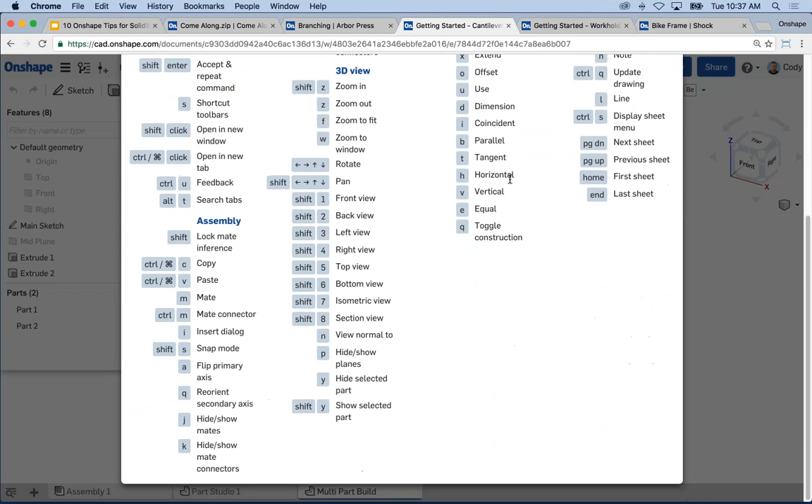Now, a commonly asked question, can it be customized? The answer is no, not yet. That is something we're working on, but right now this list can't be changed. But you have just about every command that you can imagine. So different areas. You have keyboard shortcuts for sketches, keyboard shortcuts for Part Studio or assemblies or drawings.

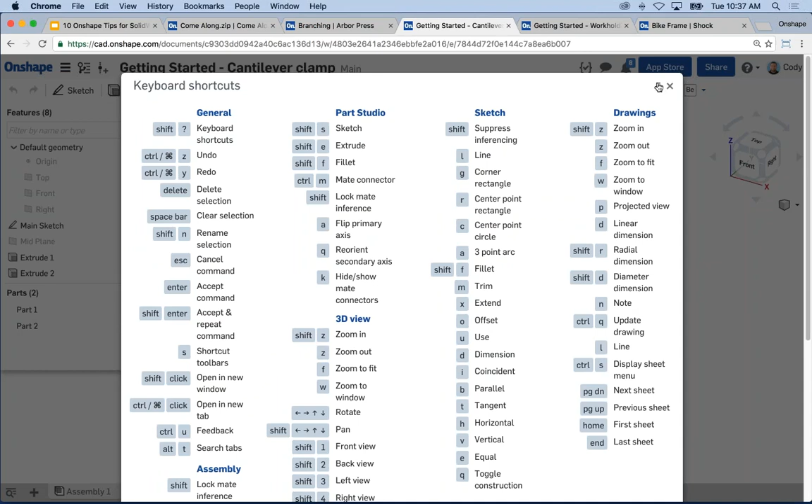Another tip that I have is there's a little arrow here. You can pop this out into a separate instance of your browser, essentially, and move it to a separate monitor or print it. Another commonly asked question, I can right click and print this. So just a tip, you can pop out the keyboard shortcuts and put them on a separate monitor or print them. All right, so that's the keyboard shortcuts. You'll find it again under the help menu.

Question, I would like to generate an animation video to show to others. I have not been able to find that capability in Onshape. We do have the ability to animate a mate, but we don't have the ability to capture a video and create a video file for you. So what I've seen other users do in that application is just download a video recording software. There's lots of free ones out there, and there's some with free trials, and then just record their screen while animating in Onshape.

And just a tip, you can right-click any mate in Onshape that has motion, and you'll see an option to animate, and then just do a screen record and send that out. But Onshape itself doesn't have a way to convert the animation to a video file for you. Again, that's something that you have to do with a separate application.

Okay, so moving on, the next tip in my list, and it's a big one, but it's a real simple one. I think if you've been using Onshape a while, you may say, no, duh. But I think for the new user, this is an easy one to miss. And it's still one of the most common questions we get. Where's the save icon? How do I save? And it's a hard practice to break coming from a file-based system where saving is everything, right? Saving can mean not losing hours and hours of work.

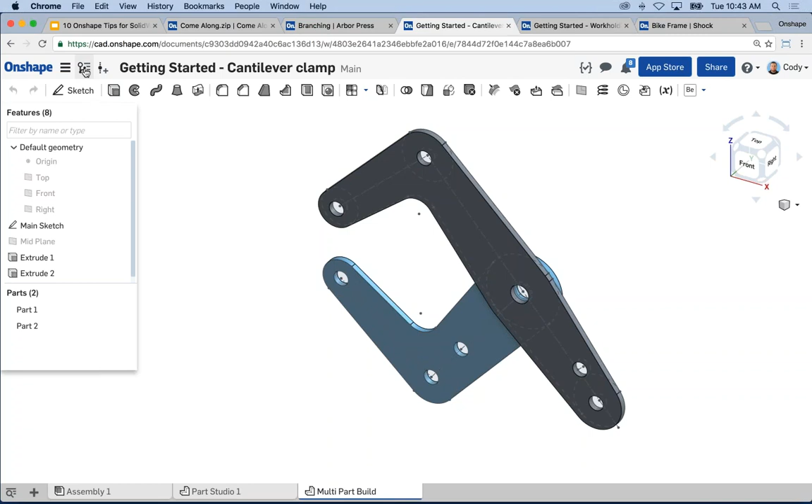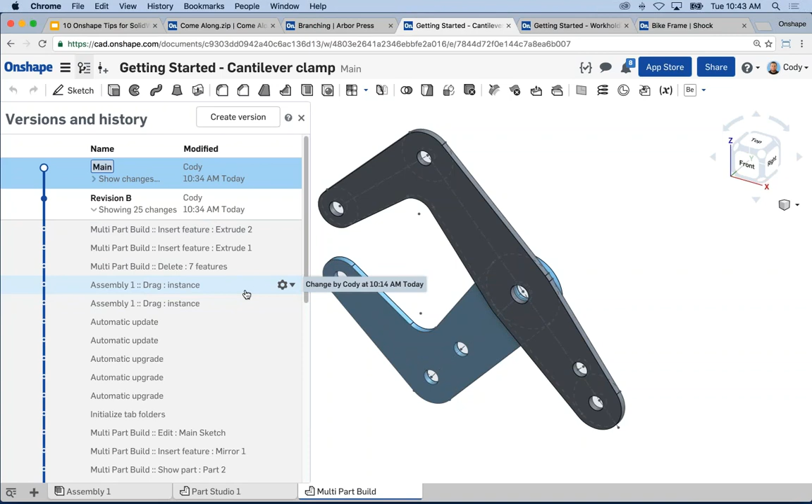So again, history, you can think of it as an infinite undo, but essentially it's just a big list of all the changes you've made. And as I mentioned before, because you can share a document with multiple people at the same time, this also becomes an audit trail of all the changes. So if 2 or 3 people are working on this part, I can see who did what and when. So that is history. The big tip is you don't have to worry about saving. Never have to save in Onshape. That's done automatically. Okay? So think of it as an infinite undo.

All right, so a few questions that I've seen pop up. Do you lose the history after you've made a revision? The answer is no, you do not lose the history after creating a version. Now, if you create a copy, you will lose the history, and that's an important thing to point out. So just keep in mind, if you create a copy, you will lose the history, but simply creating a version in a document or creating a branch in a document does not eliminate the history.

Question: is there a way to animate multiple mate connections at the same time in the assembly? No. That's a good question. Right now, you're animating one mate at a time.

Okay, so last tip, number 1, and it's definitely the most important tip that I would recommend for the SolidWorks user that's trying out Onshape for the first time. And it's one of the biggest things, especially if you find yourself having to go back and forth between CAD systems. And that is rotate, pan, and zoom.

In Onshape, by default, our rotate, pan, and zoom is different than SolidWorks, and that's oftentimes one of the easiest things to miss, to get hung up on when you're getting started. All of a sudden, the zoom is backwards, and rotate is this, and I'm used to this. You can change the rotate, pan, and zoom settings in Onshape to match SolidWorks specifically.

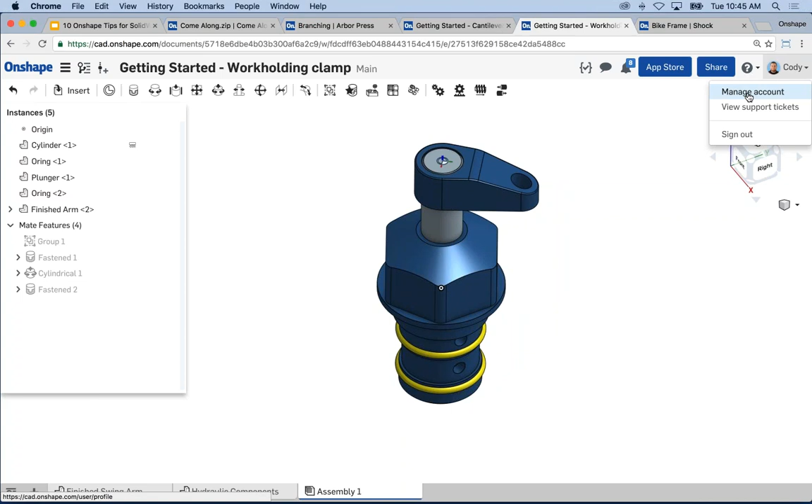This is where you'll find all of your account settings, units, email address, security options, all that kind of miscellaneous administrative stuff associated with your account, you'll find under Manage Account. Under Preferences, here on the left, if I scroll down, you'll see View Manipulation.

The reason this is so big is I can set this specifically to SolidWorks, and it will change the middle wheel drag or middle wheel rotate, and the zoom settings will be reversed. All the things that you're used to in SolidWorks will carry over into Onshape. So again, big tip that I'd recommend, and it's not just specific to SolidWorks. If you've come from NX or Creo, or you just like the mouse settings that they use, you can set your Onshape settings to match that.

Okay, but a big tip, we have SolidWorks as a specific view manipulation option meant to ease that transition from SolidWorks to Onshape. And it just means that you don't have to relearn zoom or rotate or pan. Okay. One last thing I want to mention is when you change these, make sure to click the big save button just to capture that so that it refreshes. All right. So click save and you'll be done.

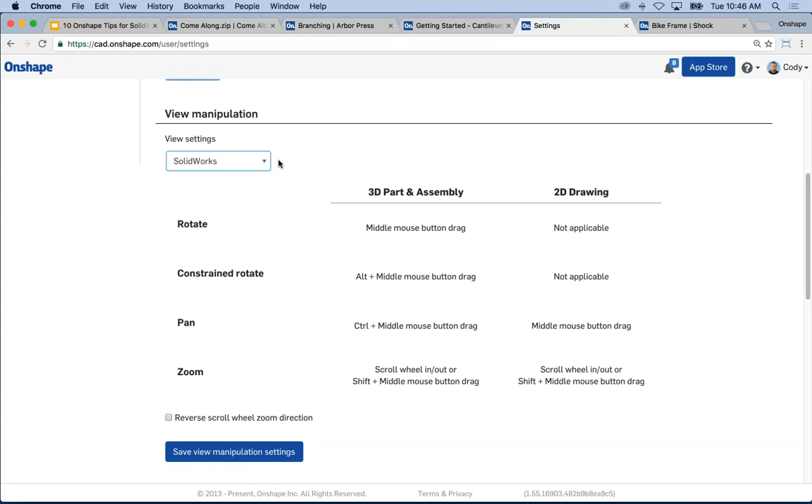But again, tip number one, change your view manipulation settings to what you're used to in SolidWorks. It'll make it a much easier transition when going from SolidWorks to Onshape. So that is what I had planned.

A quick question: can I make a single part transparent in the assembly? You can make a single part transparent, but it must be done in the Part Studio, and that will be reflected in the assembly. All right. So just keep in mind you can change the transparency associated with the part, but you must do it to the Part Studio and then have it update in the assembly.

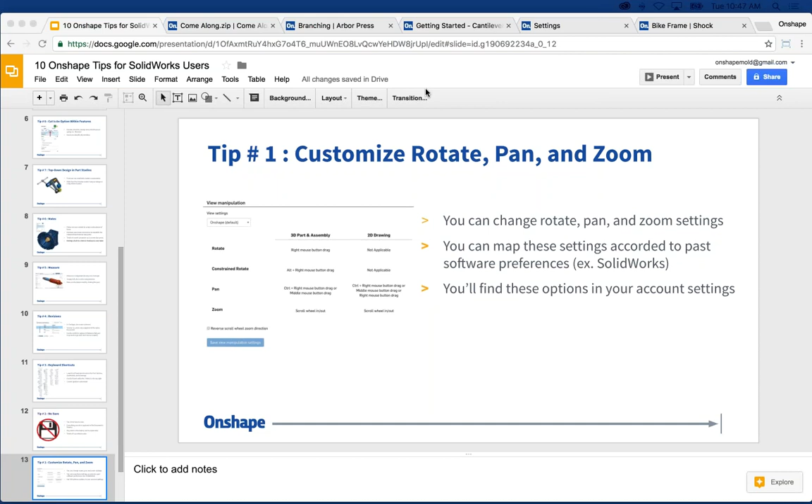Another tip, and this is just kind of an aside, in an assembly, or Part Studio for that matter, you can also right-click and isolate. So I can select a whole series of parts or just a single part and isolate it, and it will make all the other parts transparent.

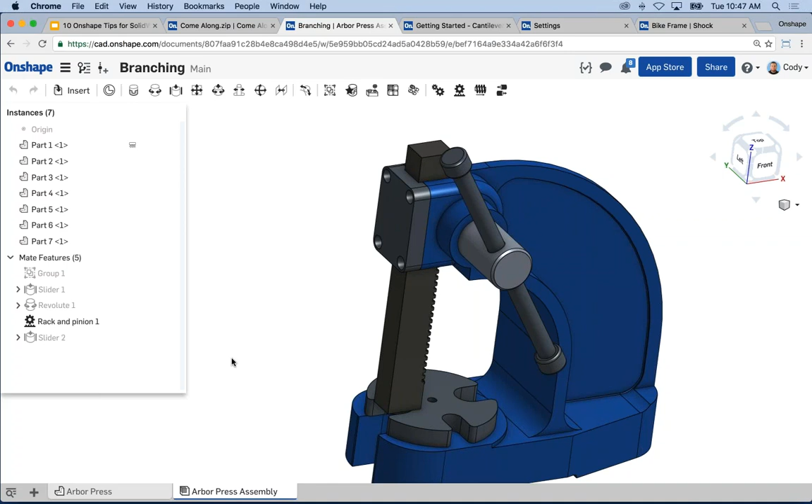Right? So it is changing the transparency state of different parts at the assembly level without having to change the actual appearance. But otherwise, you would need to go into the Part Studio, right-click a part, and edit the appearance and change your transparency. Okay? And anything done here will, of course, impact the assembly. All right, so that is what I had planned.